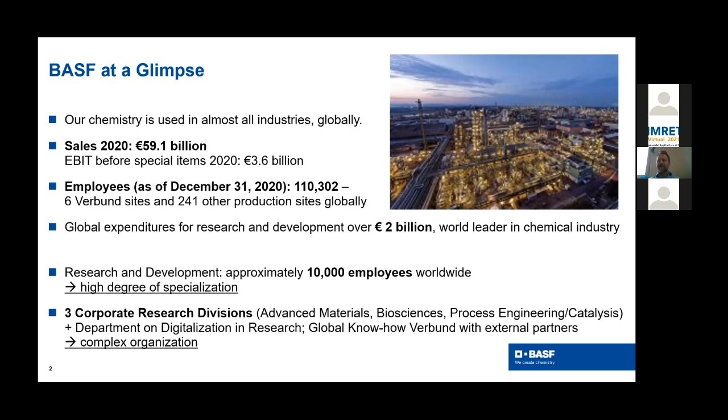Well, change is required, we think, because for decades it's been shown that there are many undisputed benefits to flow chemistry. It's been shown that there is continuous processing expertise at the world scale at BASF. So why would we be reluctant to using it on any small scale that is smaller than world scale? And there is best practice available, mostly from the pharma sector. So we started out by asking ourselves the question, why is flow chemistry not widely applied in R&D and in specialty chemicals production at BASF?

And the first question, of course, you have to ask is, would it even fit BASF's strategic goals? And those goals are around sustainability, and sustainability can be seen in three different parts depending on what you're talking about. One is CO2 footprint. The second one, mostly in the materials business and polymer business for BASF, is around circular economy. And then you have collateral environmental damage, for example, for agricultural actives, but also for solvent use and synthesis.

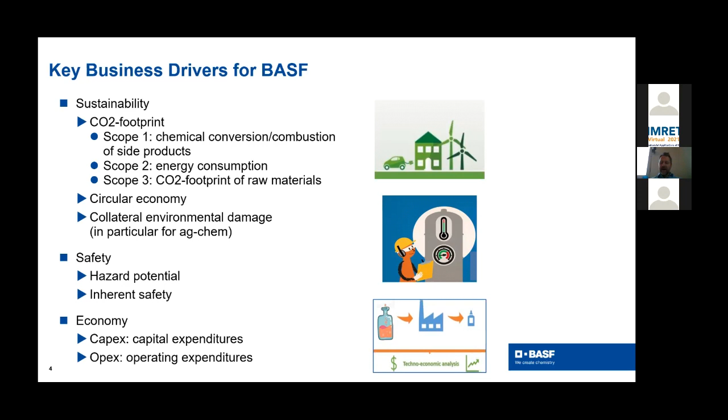Processes need to be economical and competitive in the chemicals production market. Focusing on sustainability, we think that flow chemistry has a lot of value in chemical conversion.

It has been demonstrated in hundreds of examples to yield more product and to be more selective than batch processing. It bears the potential of making renewable raw materials amenable to chemical processing. And by smart and challenging chemistries, we may reduce the number of synthetic steps to arrive at a desired molecule. That's called step economy in our business.

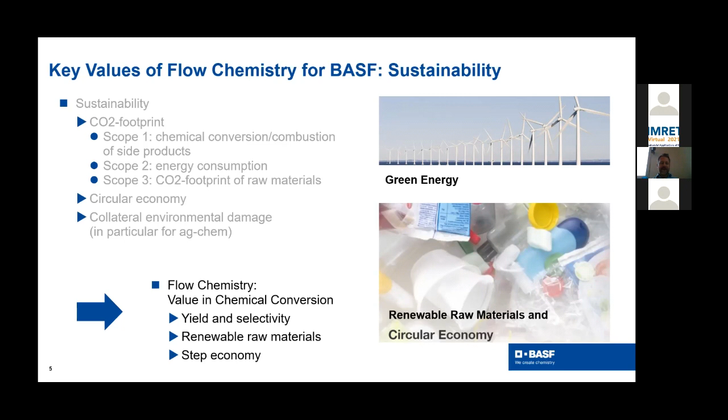In terms of safety, we're looking at a number of key values. One is, of course, related to the smaller hold-up volume of a flow reactor compared to a batch reactor of similar productivity. And the other one is very much driving into the direction of microreactor technology about intrinsic safety.

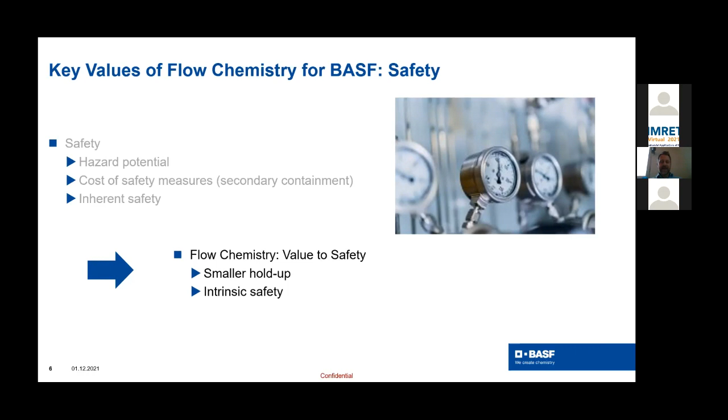In terms of economical value of flow chemistry, we're confident that we can have the same low specific investment—that's the euros of investment per ton of capacity that you have to do—as in world scale processes. We're confident that we can have benefits with respect to operating expenditures by saving labor in a continuous process, by saving synthetic steps in order to get to the desired molecule, and by improved product consistency.

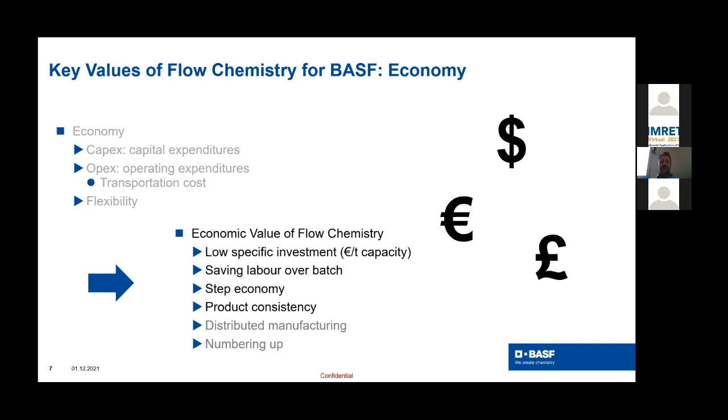In terms of transportation, distributed manufacturing might be a future avenue. And in terms of flexibility, numbering up, and the modularity that we've just heard from Sebastian are certainly avenues to be explored. Now that we've set that flow chemistry actually does make sense for BASF and fits its strategic goals,

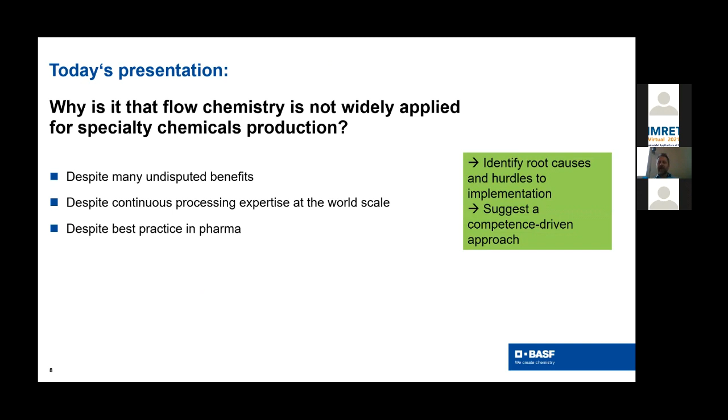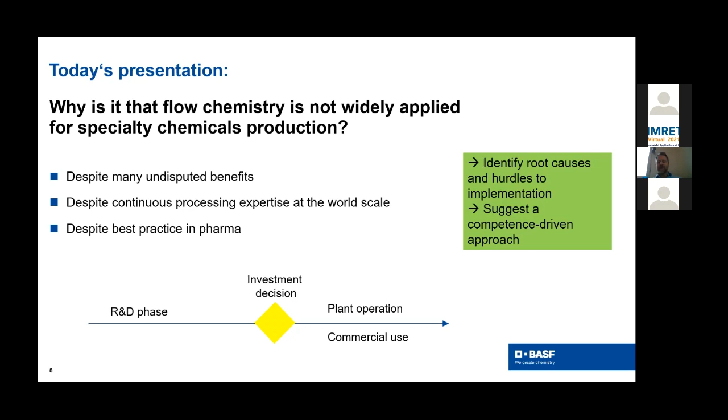Let's look at what the root causes and hurdles to implementation are. And I will then move on to suggest a competence-driven approach. In doing so, what I'm going to talk about is mostly the R&D phase, because in looking at the deployment of flow chemistry, there is one particular milestone, and that's the investment decision. If you're managing your R&D process to get to a positive investment decision, then you're carrying flow chemistry into production. And then plant operation and commercial use are going to follow.

Failure is cost intensive, and it costs money to invest into the assets that you need in order to perform flow chemistry on a lab, pilot, or production scale. Risk is something that is a major consideration in management. Will the technology pay off, and will it be accepted? What about asset utilization, and what do we do if we need to react flexibly to changes in the market?

Then there is an individual dimension. One is about the personal competence—do I know when and how to apply flow chemistry? And do I have access to fully equipped facilities? If I have to wait for a pump for 4 weeks until the order has been processed, then I'm not flexible, and that's going to slow down my R&D.

And the final set is around organization. How do I set up a seamless R&D workflow? And how do I generate best practice and workflows for scale up? So handover—that's a major organizational challenge.

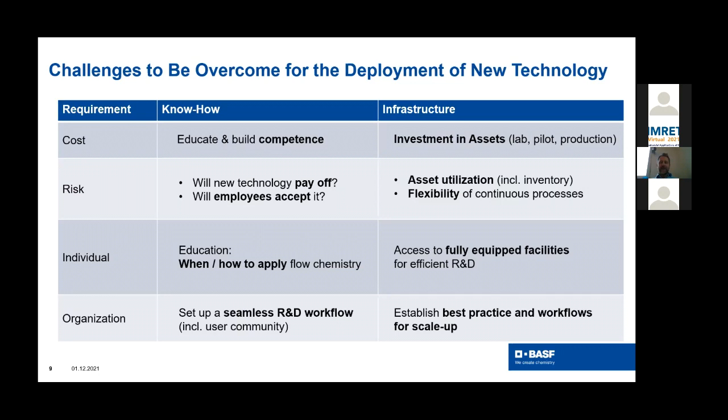If we're condensing that into the challenges that we need to tackle, it's challenges around the infrastructure, around competence, and around communication. And that all is going to build up to the workflows, both on the personal individual side and on the infrastructural side. In translating that into actionable measures for flow chemistry deployment, we need to establish technological solutions, provide appropriate infrastructure. We need to generate best practice in order to be able to quantify the risk and build confidence. And we need to set up communities that will allow for a seamless and holistic workflow.

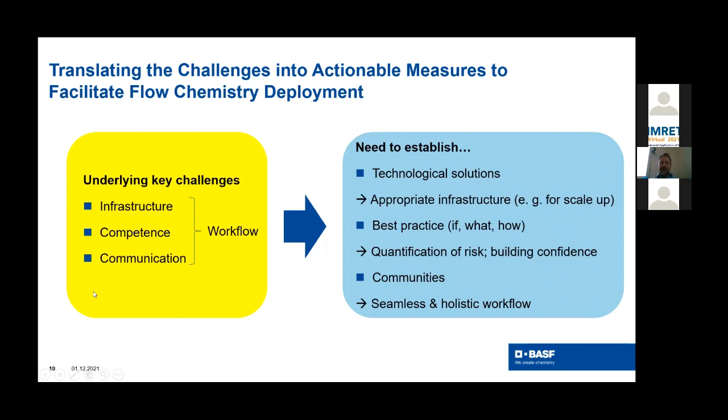Now, the way we're tackling this is about addressing the key challenges in strategic collaboration with academia. Why would we go external? That's the first question to answer. Our take on that is there is competence outside of BASF that is complementary to our expertise, and it's good to bring these competencies together in order to drive new and disruptive technology.

The setup needs to be interdisciplinary. We've chosen a setup of a PhD cluster, which is going to deliver impact only in the midterm. So we're going on a journey of change management, and that's why we're selecting the format of a PhD, which takes about 4 years to start with.

We've selected a bespoke setup. We're focusing on Imperial College as our partner, and that gives us access to excellent talents and infrastructure. We're assuming a mindset of co-creation to develop our technological capabilities, and we're engaging in a strategic partnership. The way I would define strategic is that we're sharing the vision of how we want to make research have an impact in industry, and that's going to help us tackling the challenges I mentioned before.

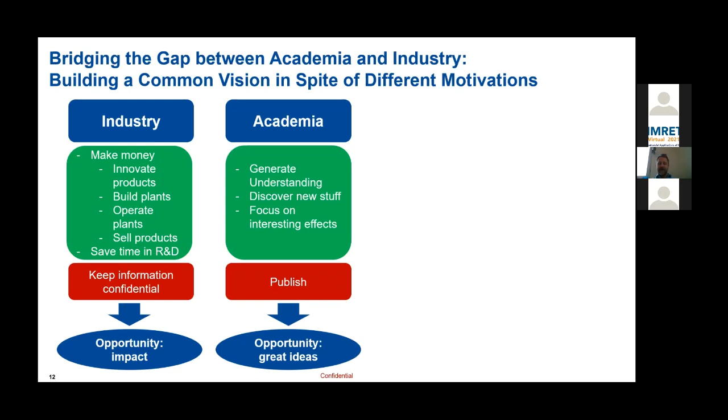So it is important to align, to combine the opportunities that industry holds in terms of impact and that academia has in terms of coming up with great ideas and understanding. That's what we need to align in order to make research have an impact - the shared vision that I just talked about.

The atmosphere in coming up to that point of aligned goals, strategic vision, is about co-creation. And I would call co-creation something where an academic and an industrial scientist talk on eye level, with respect both on the scientific level and on the personal level. And they need to have fun, of course.

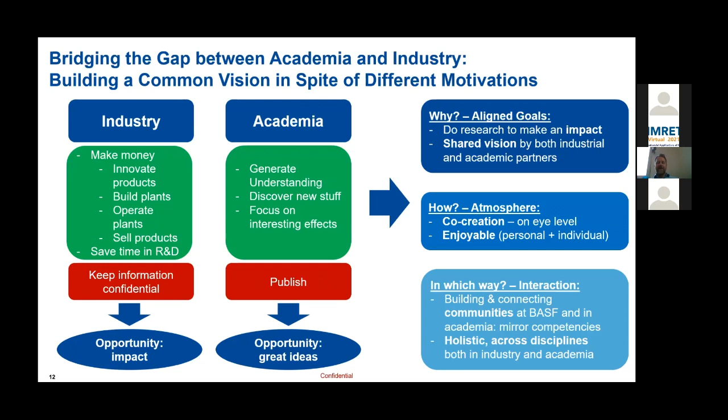Collaboration is a partnership, an individual way of interaction. That brings me to interaction. I think that driving flow chemistry toward a widely deployed technology in industry requires building and connecting communities. It requires mirroring the expertise in industry with the expertise in academia and vice versa, and it requires a holistic and interdisciplinary approach, and that's what I'm going to talk about right now.

Holistic means that we're considering the whole R&D workflow, which generally starts out in the lab with a proof of concept experiment, showing I can have the desired chemical conversion in my flow reactor. Then we're inevitably going to go through a screening and optimization stage before we enter into the pilot scale. On the pilot scale, you have classical reaction engineering challenges like reactor design and scale up, but you also have additional safety requirements.

In designing a flow chemistry process, you will need to integrate separation units into your consideration. And we're looking even ahead in order to prepare everything we need to have in hand for the investment decision to be positive - we're looking at techno-economical benchmarking, value and supply chains, and the like.

In parallel, we're setting up infrastructure at BASF, and we're preparing for the transfer, which is already taking place during the early stages of a PhD by aligning visions, bi-weekly telephone conferences, and is going to be carried out in the form of 6-month placements to BASF in the later stages of a PhD. With that, we hope to build the competence and have the information available to take a positive investment decision into a flow chemistry plant and eventually operate the plant.

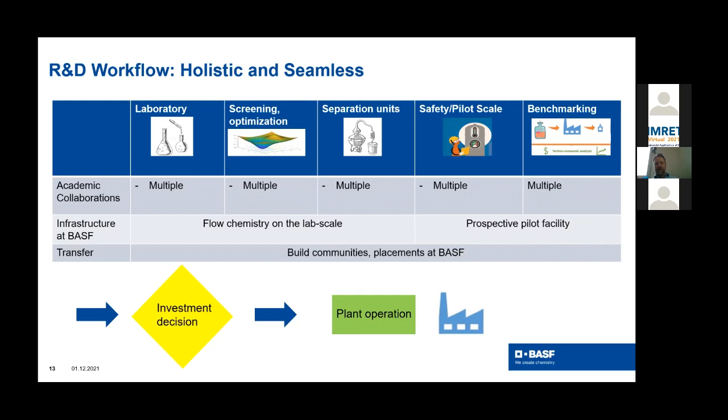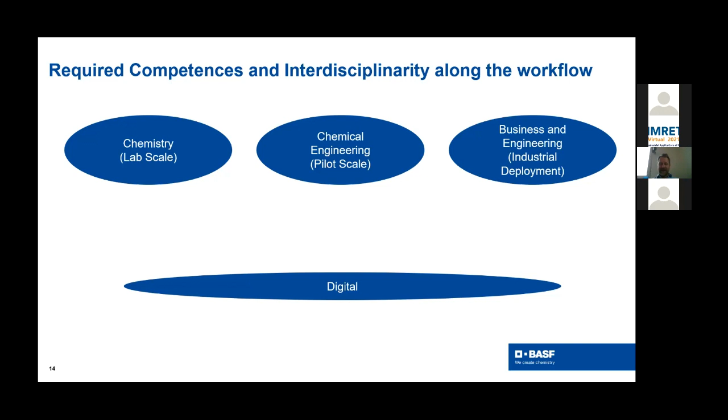In terms of interdisciplinary approach, we're convinced that we need to combine the chemistry, the chemical engineering, and the business as a holistic and interdisciplinary approach. There is an underpinning technology, which is the digital methods centered around machine learning and data science, but also multiple other things, starting out with modeling, going through computational fluid dynamics, all the way to value chain optimization and in production, even predictive maintenance.

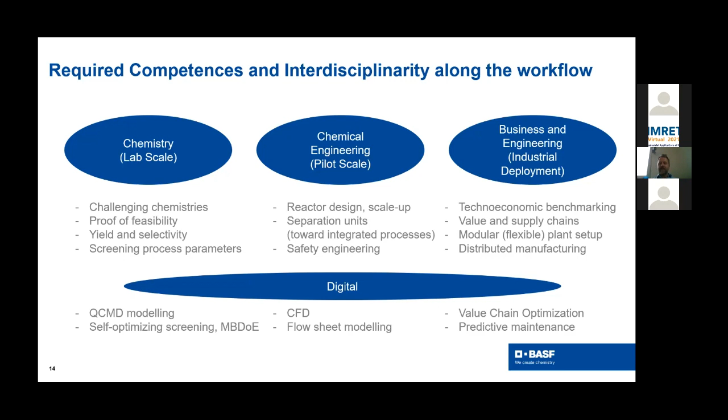So with that, we've designed a vision of a holistic and interdisciplinary approach. But how do we realize that, and what are the hurdles, the valleys on our way to industrial deployment? There are multiple dimensions where things can fail. One is certainly along the R&D workflow.

It is not natural that people in the lab know how to communicate with people in the pilot scale, and those might have completely different opinions than people in production. The same holds true for interdisciplinary approaches. Chemistry, chemical engineering, digital, and business people speak completely different languages.

There are cross-departmental issues to be resolved in two big organizations. BASF and a big university like Imperial College are separated into departments, and usually that results in organizational hurdles that need to be overcome and sorted out.

Then, of course, we have many stakeholders at different levels of hierarchy. A technician that operates the machine speaks a different language than a scientist. And of course, the scientist needs management to buy in, so appropriate communication with management in order to realize what he perceives as an opportunity.

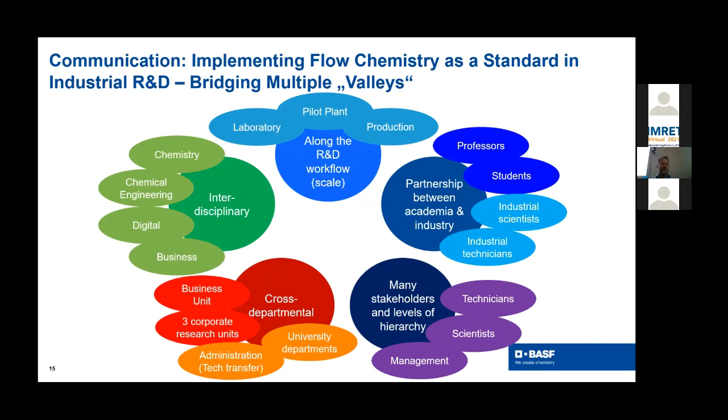And finally, if we're partnering with academia, we need to somehow coordinate between professors, students, industrial scientists, and industrial technicians. So we need to find a way of communicating with each other. And communication is really the key.

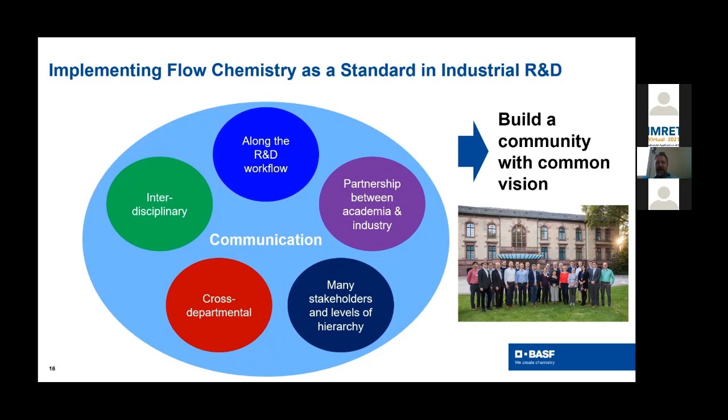And in times of Corona, we're facing some additional hurdles. Nonetheless, we've managed now to have two flow chemistry conferences at BASF, bringing together all the stakeholders from management and industrial scientists, professors, and students with a variety of interdisciplinary backgrounds.

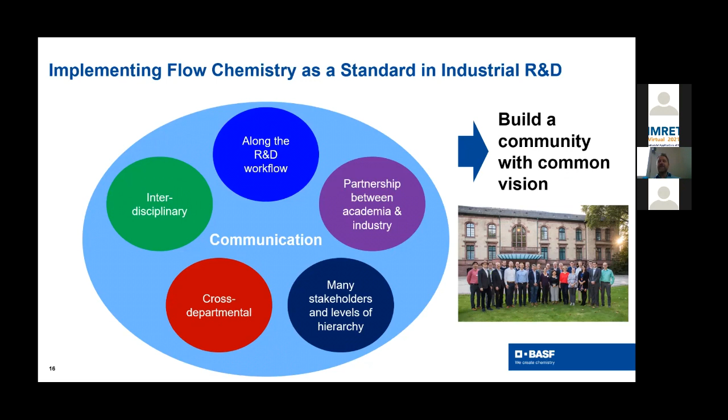Now, I would like to wrap up with two slides on where we think it is best to start out doing flow chemistry. It's about balancing. We cannot tackle everything, and BASF's view on flow chemistry might be different from GlaxoSmithKline's view of an end-to-end flow chemistry process. We think that typically you will want to have two to five telescoped steps in order to reduce process complexity and improve flexibility.

Also, in terms of modularity and investment, BASF assumes a fairly pragmatic view on specific bespoke processes versus multi-purpose, flexible, modularized processes. We think that it has to be a case-by-case decision.

Standardization is very much the same. Do we need specifically designed kit, or do we use off-the-shelf equipment? And eventually, the investment is a decision that will be taken for every single process. Can we use our depreciated batch facilities, or can we imagine investing in a new flow chemistry process?

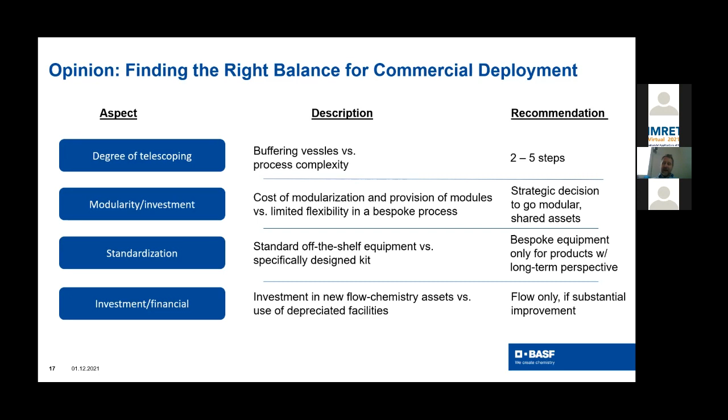Overall, the future development of flow chemistry is, according to my thinking, going to be supported by a number of trends that are in some cases quite unrelated to flow chemistry, and that tap into every single stage of the R&D workflow. These trends are around self-optimizing systems, process simulation using digital methods, digital twins, all the way to decentralized production. We think that there is a number of developments going on that will boost flow chemistry deployment in the next years.

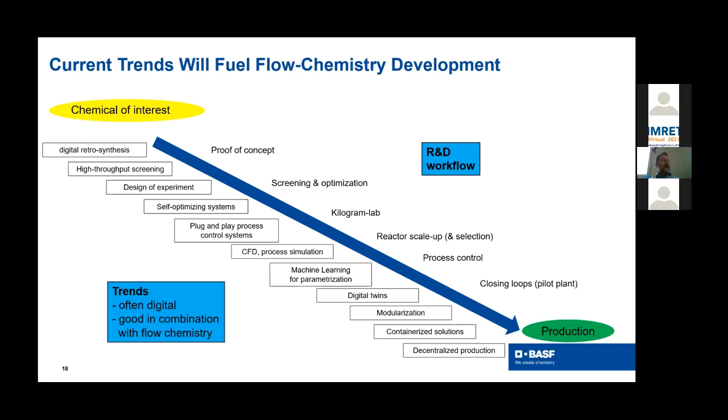With that, I would like to conclude my talk. I started out by checking and confirming that flow chemistry holds great promise for BASF's strategic research challenges. I think, and that's our opinion, that a coherent, holistic R&D concept is required, comprising infrastructure, competence, the communities, and therefore the entire workflow. We think that complementing our internal expertise with external partners in academia is the right way to go.

For a holistic, interdisciplinary, and stakeholder-oriented way in which we need to take good care that communication works well. The future will show how we can balance the different requirements, and we're going to benefit from complementary trends.

And now I would like to stress one of Sebastian Hettner's points. We think that an efficient R&D workflow is possible through flow chemistry. We think that it will be possible one day to consider the requirements of later stages of R&D very early on by bringing in expertise from engineers, from modeling, and from process simulation to the early stages of laboratory work. But that requires a change in mindset, an openness, and change management in the organization.